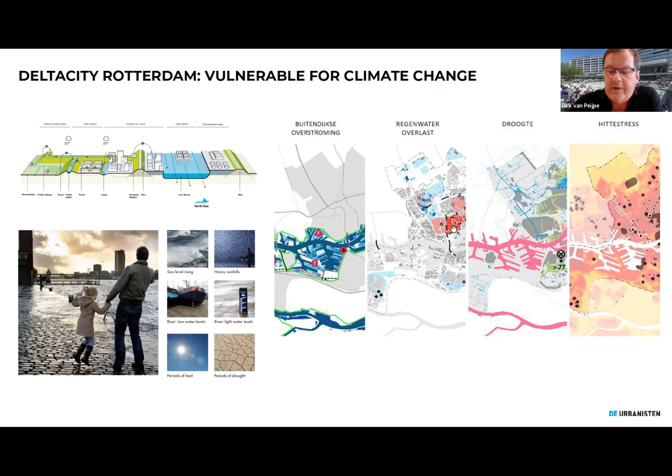Well, thanks for the invitation. I'm happy to lecture in Pavia. I learned it's not Pavia, but Pavia - we have some Italians working in the office, that's the reason why.

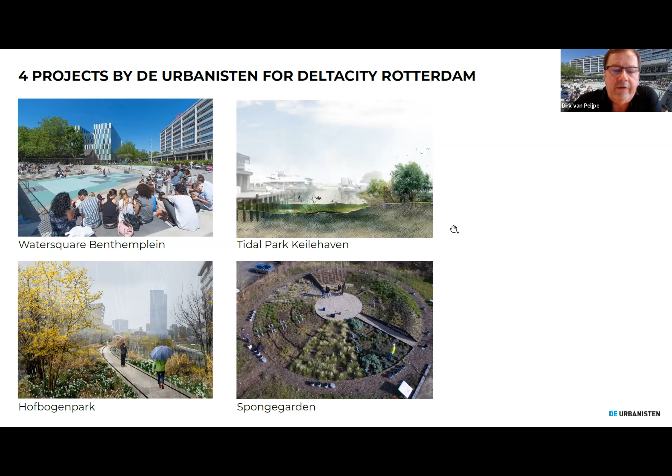What I wanted to do is basically very shortly introduce the office, but I would quickly touch upon the main mission or vision that we have on our profession, which is landscape architecture and urbanism. I decided for this lecture, because the theme is very much about water in places, to select four projects that we are doing or did in the city of Rotterdam, which is also our hometown. So that will be the build-up of my lecture.

To start with the team, we are around 12 dedicated designers. We're international, and some of us are educated as urban designers, others as landscape architects. Our projects vary from larger scale urban studies, research and design, to urban plans and public space design. This is just a collage of work we do.

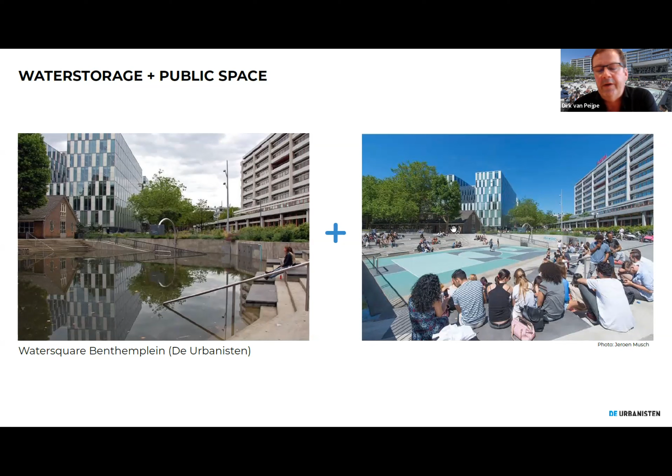In almost all our projects, as you might already have seen when you visited the website, themes like climate change and loss of biodiversity or energy mitigation are important for the agenda of our office, and to integrate that into our plans is one of our main goals.

I'm not going to extensively share all the issues that come with climate change, but I want to start with this. This comes from the summer of '21, and basically what climate change means is that we have to start dealing with extremes. It's not only too little water, but also sometimes too much water, and even sometimes in one month you have both conditions.

So it's first of all how to deal with these extremes of climate change, and I think specifically where water is part of the urban configuration - I'm talking about delta cities or cities that have larger rivers or river basins - we see accumulation of problems. I'll get to that later, in our city in Rotterdam.

So for me, one of the starting points in starting the Urbanisten with my partners, was the question: can we make our cities more climate sensitive, and specifically sensitive instead of climate proof? Because I think it really links to us as people and the daily living environment that we have, to not only make it climate proof but also more attractive. The way we approach our project is, first of all, this question: can we make our cities more adaptive to climate change?

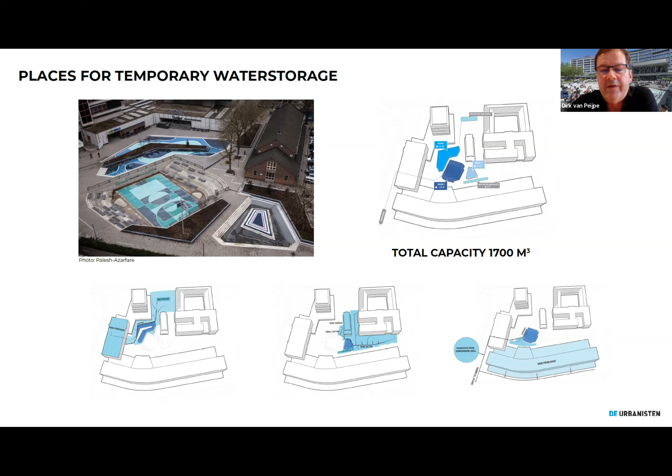And we have references from the past in which we were more in balance with nature, you might say, and our architecture was also taking into consideration the climate conditions we were building in. It was Darwin who said, in the end, it's not about intelligence or strength, but more the adaptability that makes the difference. Well, I wanted to introduce a second hero, if you might say so, which is Jan Gehl, from Copenhagen, Denmark.

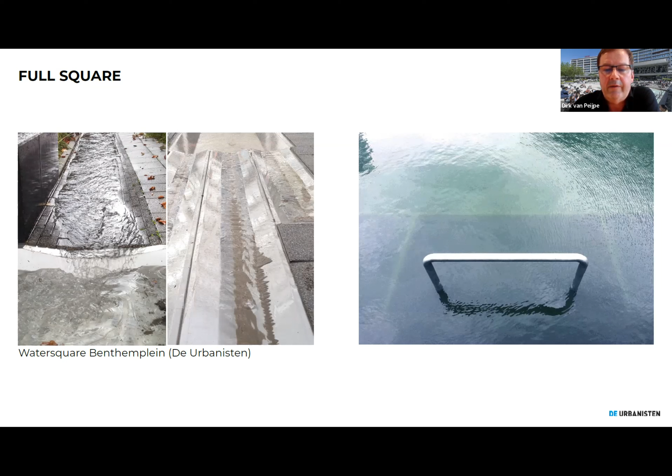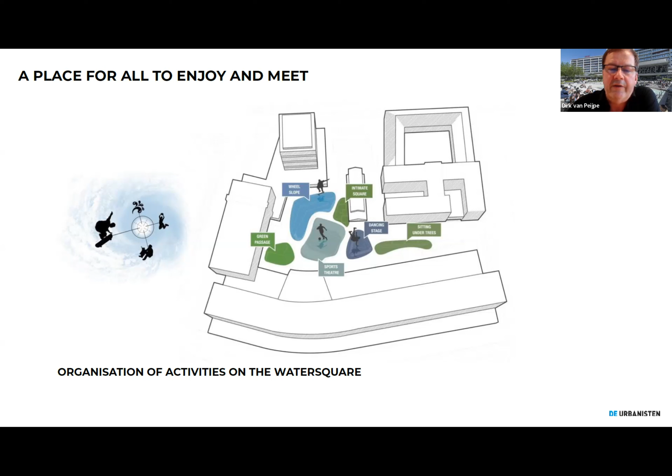It's relevant not only to focus on climate adaptation, but also immediately link that to our profession. So can we make our cities more livable and attractive at the same time? Otherwise, you're just only solving a problem. Jan Gehl is an inspiration because he says we have to start with life, and life in the city. Cities are for people, and then you might look at and design space. And finally, of course, it's also about the buildings, but it's in that order - life first and buildings last. That's an inspiration for me as well.

So the question is, can we, and how do we do that? We need to integrate our climate-proof measures into our cityscapes. And that's what we've been doing with the Urbanisten ever since we started in 2009.

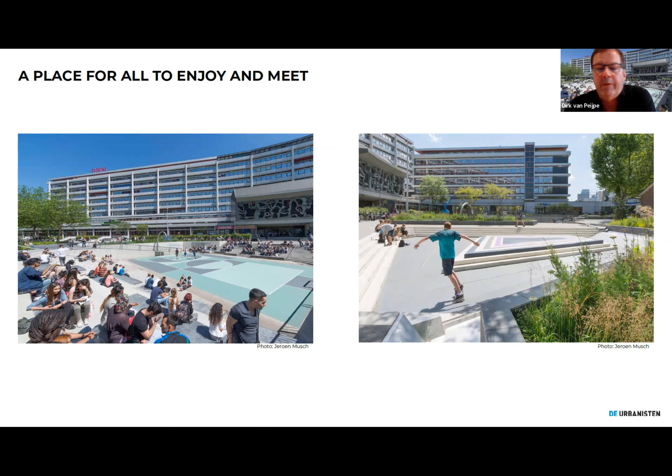We come from the city of Rotterdam. I don't know if some of you have visited the Netherlands in this part of the country, but for those who didn't, it's a delta - it's the end of big rivers coming from Germany, ends up in the sea, and also has an open connection with the sea. It's a major port city, but also a regional economic center.

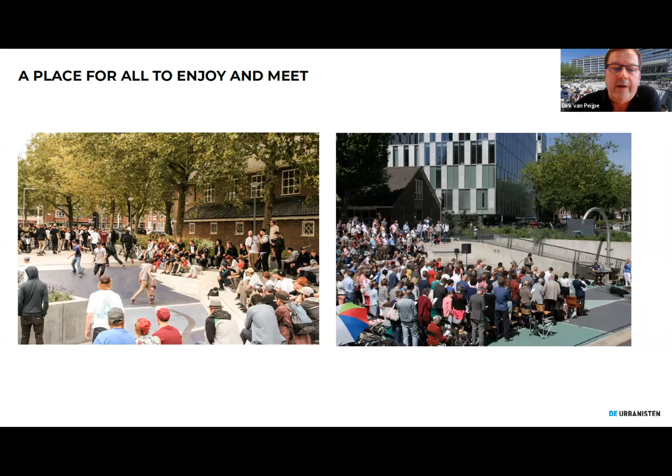And for the Urbanisten, it's not only my hometown - I live in Rotterdam - but it's also what we call our living lab. This is the place, this is a city where we can do our research and design. Also our realizations are located in Rotterdam. Not only in Rotterdam, by the way, we work in many other European places as well, but Rotterdam is important for us.

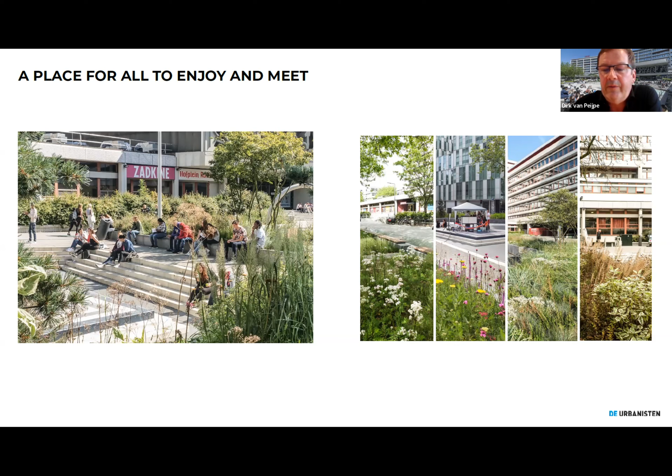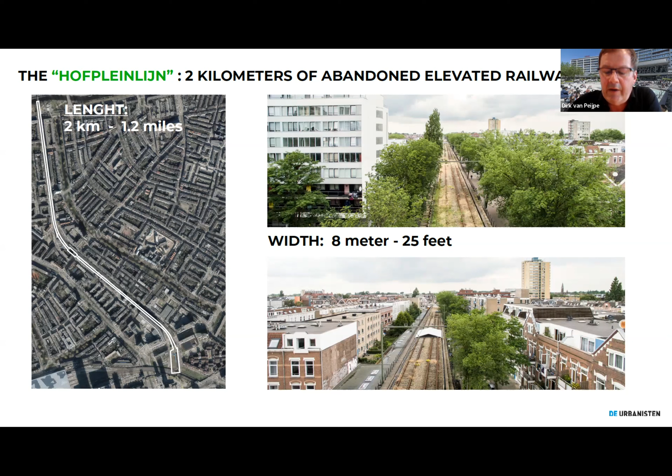It would take a complete lecture to go deep into the systems and situation of this delta city of Rotterdam when it comes to the impact of climate change. For now, it's good to know that the city has quite a robust system to deal with flooding, drought, heat and rain. But given more extreme situations, and given that water is so prominently there, there's a sort of vulnerability. So if there's a city that needs to look ahead and see how to act, Delta City Rotterdam definitely is one of those places. We did projects there that deal with this vulnerability, but also try to add a quality of space.

I'll run through 4 of the projects that we have done or are doing: the Water Square, which probably is well known to some of you; the Sponge Garden, which we realized 2 years ago right in front of our office; and then the Tidal Park and the Hofbogenpark, both also in the city of Rotterdam.

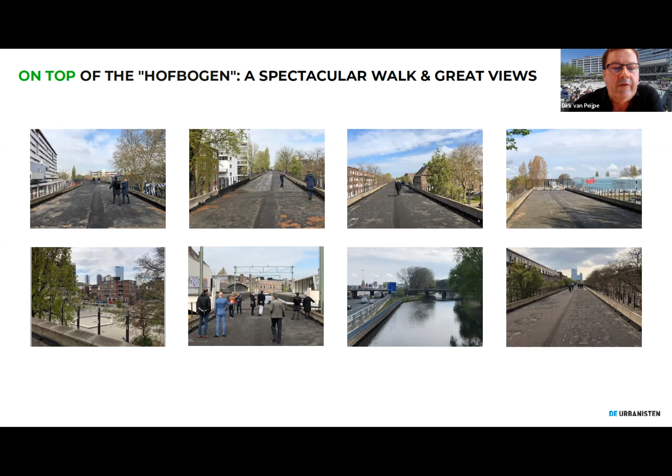I want to start with the Water Square, a project that was realized in 2013 or 14 in Rotterdam. The main idea is very simple — it was innovative and groundbreaking at that time. The idea is simply this: you create a public space that can also flood in situations where we have an abundance of rainwater coming into, in this case, a quite dense built-up urban district.

This rainwater, in the old days, ended up in a combined sewer. So one of the main interventions, of course, would be to disconnect rainwater falling in this area from this combined sewer and bring it into a basin that can flood. That's the simple idea. Well, to elaborate a little bit further...

Let's first focus on the water management. There are different places that we created because we needed topography. The square was entirely horizontal and flat when we came, but we needed topography to organize these water management buffers. So we have three different spaces that all have their own catchment area of rainwater.

We have 2 basins that are relatively shallow and take local rainwater from both public space as well as roofs. And then we have a bigger basin that also takes the largest part of the water from the surrounding, the biggest roofs, but also from a nearby district. The total capacity of these 3 basins when it comes to water storage is around 1700 cubic meters.

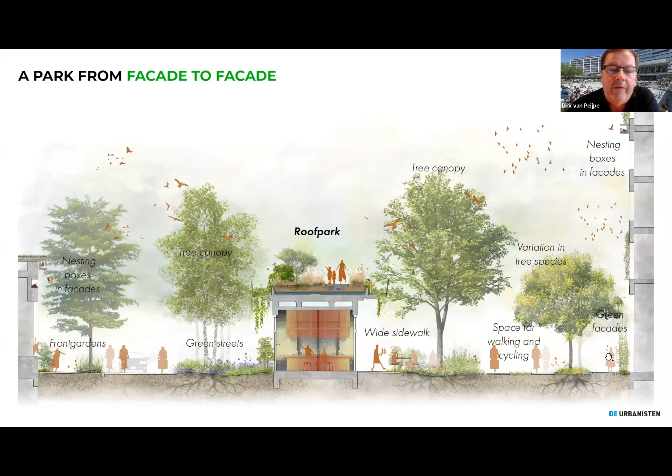It's also important how it empties. The 2 shallow basins both have an infiltration facility underneath the pavement. Of course, that takes time, but water from there will just return into the groundwater system. The other basin is underneath the groundwater level in Rotterdam, and that is pumped out to a nearby canal. So none of the rainwater will end up in the combined sewer anymore.

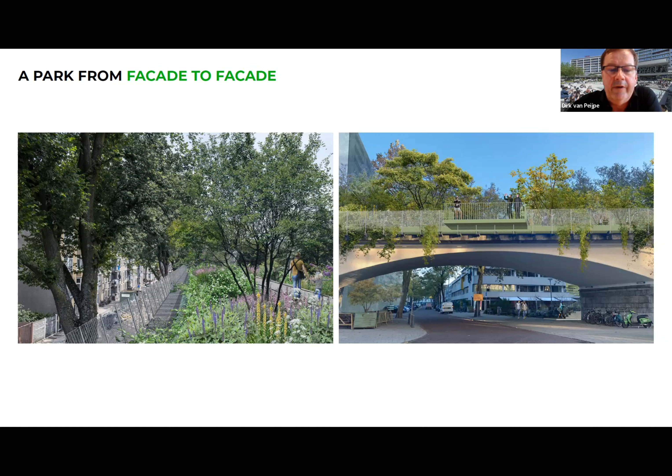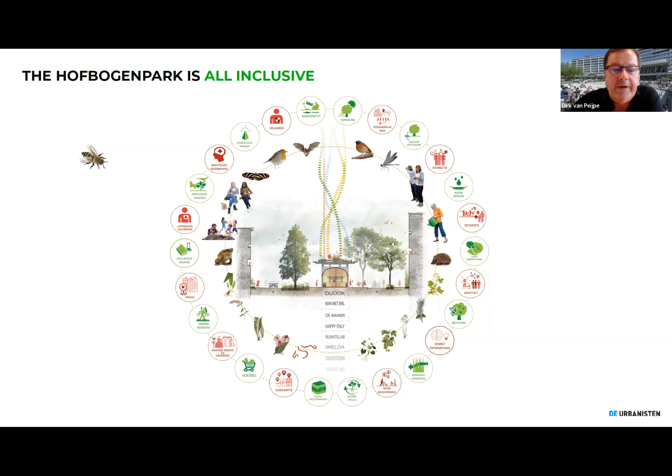Later on, if you have questions, I can answer them, but now we'll continue with what is as important, or maybe even more important, which is how to actively use the square. There are quite a lot of different groups of people or communities that all have their own ideas about how to use the square, and we try to organize it so there's some overlapping, but also so people will find those places and environments for what they want to do on or around the square.

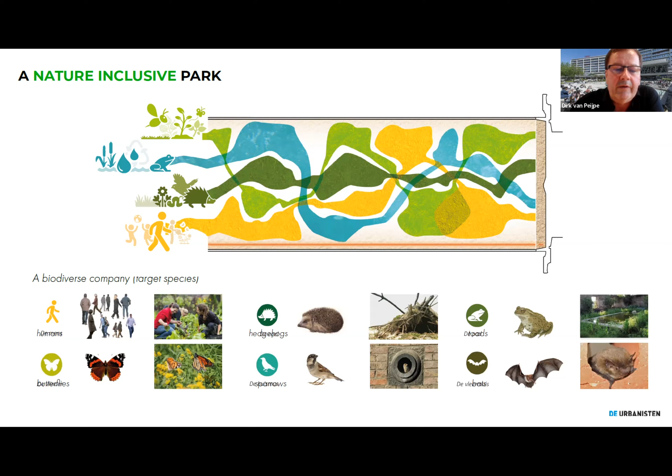A major community is the students that study in the big building you see on the screen, also some other buildings around, and they actively use the square for their lunch breaks. Some bring their skateboards, you can play ball, and specifically the deeper theater space is also used by others.

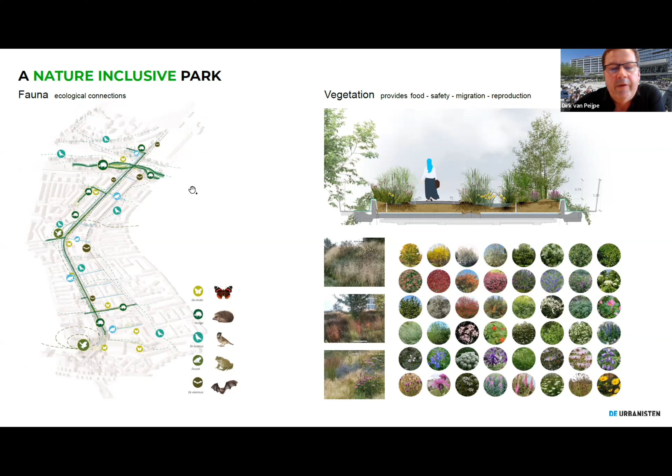The church that has a place on the square brings out the community for open air services. They also baptize their children outside, but skaters can also actively use the square. So it's a really nice combination of different communities that all find their place to enjoy and meet on the square. Sometimes you can also just be alone, being young or old, also possible on the square.

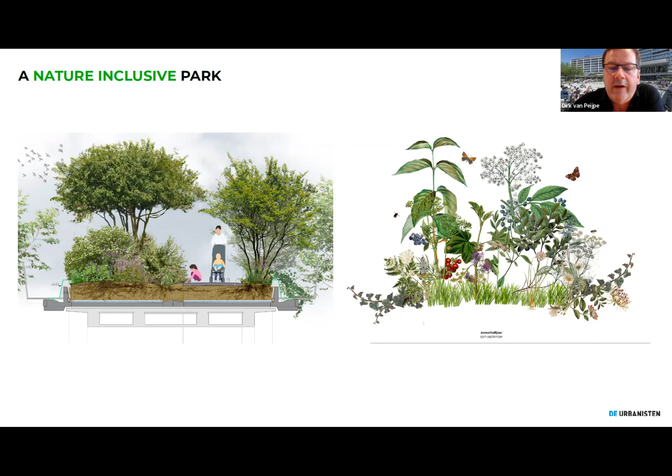And we try to make it as green as possible. There's still a little hard surface, and quite a lot of hard surfaces that have to do with the simple fact that we need to store a lot of rainwater. If you have soft spaces, that will take more time to infiltrate. But we try to make it as green as possible.

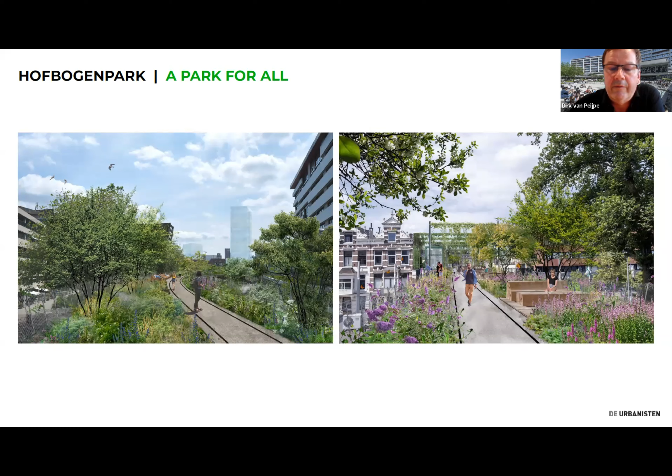I want to take a second project into account that is not yet realized, but it's work in progress. This project is called the Hofbogenpark. It's not far from the water square. The water square is situated at the south end of this long line that has a length of 2 kilometers, which is known as the Hofpleinlijn.

It's an abandoned elevated railway that runs through the northern districts of Rotterdam. On street level, it's quite a structure. It's a heritage, it's a monument. There are 189 arches, rented out to different entrepreneurs.

The side streets are quite dense with traffic. On top of the Hofbogen, the trains are no longer running, and all the train-related materials have been moved away from the viaduct. So you already have quite spectacular views and a great walk from the city center to the outskirts of Rotterdam, or the other way around.

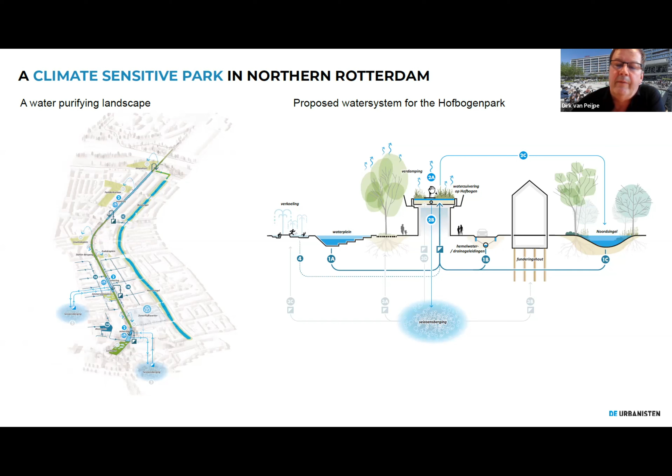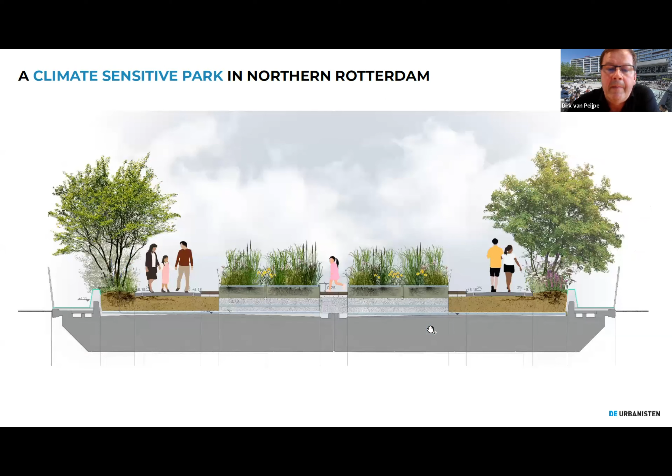We were commissioned together with DS landscape architects and Dakdokters, to design a park on top of this viaduct. Some of you might know the High Line in New York. Well, it's not going to be a High Line in New York. But if you have a simple idea of bringing a park on top of a viaduct, that fits the conversation. We're doing a few things different from the New York High Line.

The first thing I want to stress is that we not only make a park on top of a very small but long stretch of viaduct, but we also really make it a network park. That means the greenification, or the de-paving, of the immediate surrounding streets and squares is part of the master plan, part of the project. That's extremely important because it is such a small stretch that some of the park activities are simply not possible on this roof.

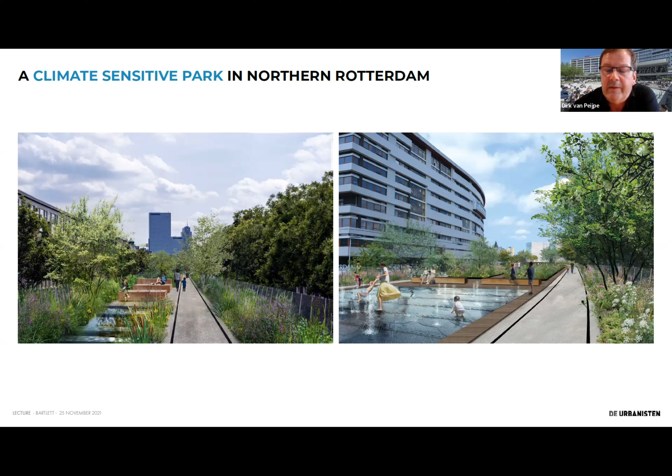So we need the surroundings for that, but it's also relevant to restore, and we'll come to that later, some of the water and ecological systems in this northern district of Rotterdam. So it's a network park, and that means this is the section that comes with that.

We're not only looking at what's going on top of this viaduct, but we try to link that to the streetscapes around, see if we can increase the density of trees there, decrease the amount of hard surfaces and pavements, and see if we can create nice places on the ground floor to linger and relax. But also really see if we can, on private property, start working on green facades, green roofs, nesting boxes for birds and bats, to really make it an integral park that adds to the quality of life of the people living in the northern districts of Rotterdam.

So there are some images of the design as we are making it, and later we'll get into the landscape itself. One of the purposes we have is not to make it an ornamental garden, but really a part of a landscape that links to the local characteristics of the Delta city of Rotterdam.

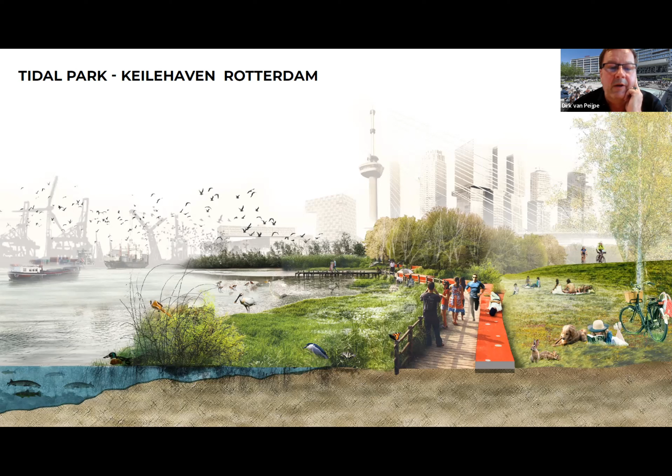The second issue that I think is really distinctive from, for instance, the High Line, is the fact that we want to make the Hofbogenpark all-inclusive. By all-inclusive, I mean we're not only designing an environment for young and old, rich and poor people that live around, but also for our animal friends. That means we look closely at what they want and what they need to be present in our Hofbogenpark, which is a design task.

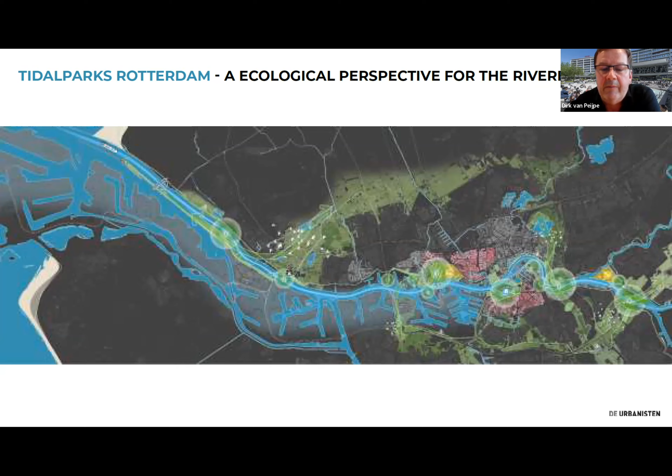For instance, when it comes to the selection of vegetation and the delivering of shelter and so on, our park is nature-inclusive, meaning we create spaces that other animals demand. We selected a few target species, and the idea is that if you create a proper park for them, you have quite a complete habitat or ecosystem of flora and fauna present in your park.

We worked together with DS Landscape, which is important because they select the proper vegetation that delivers food and shelter, and also makes it possible for butterflies to lay eggs, for instance.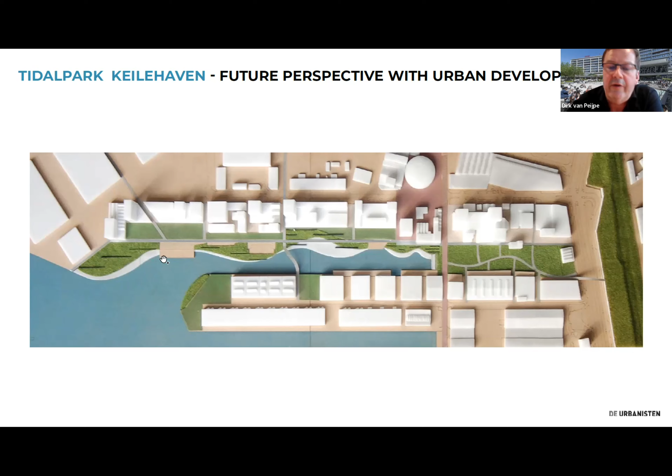Last but not least, on the Hofbogenpark I want to stress the water management. Here we took, I think, a next step in what you can do in the urban environment when you want a more circular water system - you might call it the city as a sponge, as the theme.

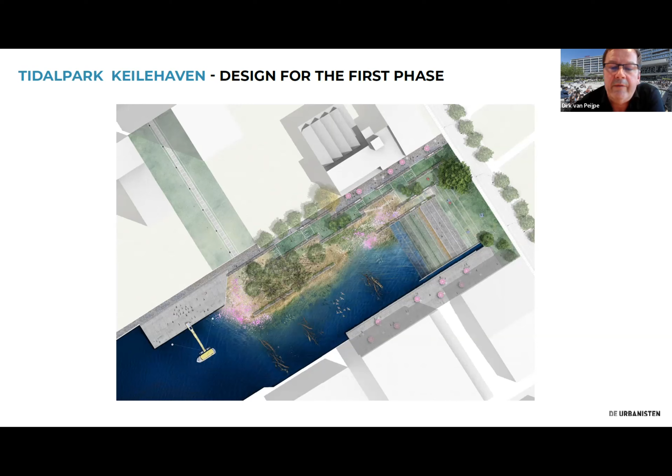Having done that, it's possible to bring that clean water into an aquifer, a seasonal storage that is an underground groundwater layer that is relatively stable. And once you've done that, it's also possible to bring that same stored water back up to the park for different purposes - that's the whole idea here.

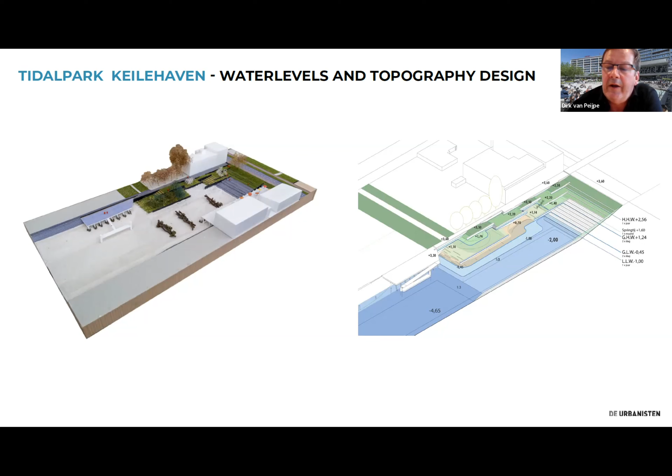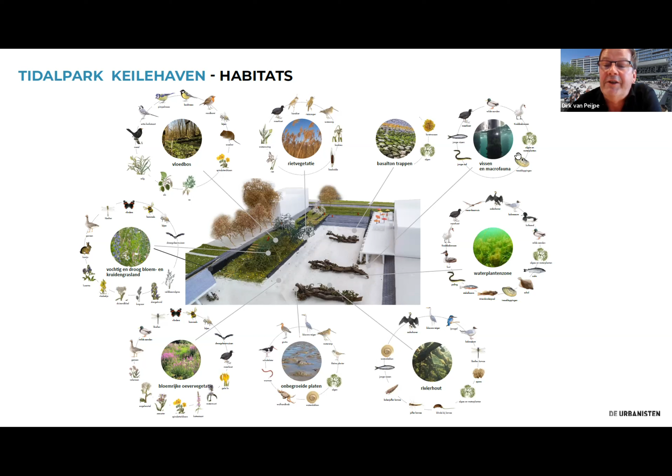But it's clean enough also to have as a landscape element. So the last part of the project, we introduce a small stream that's also linked with the desired species and vegetation as part of our roof park. It's even clean enough to enjoy in the form of fountains. And as we all know, water doesn't necessarily cool things down by definition, but actively evaporating water, like fountains, does cool down substantially the temperatures during hot moments.

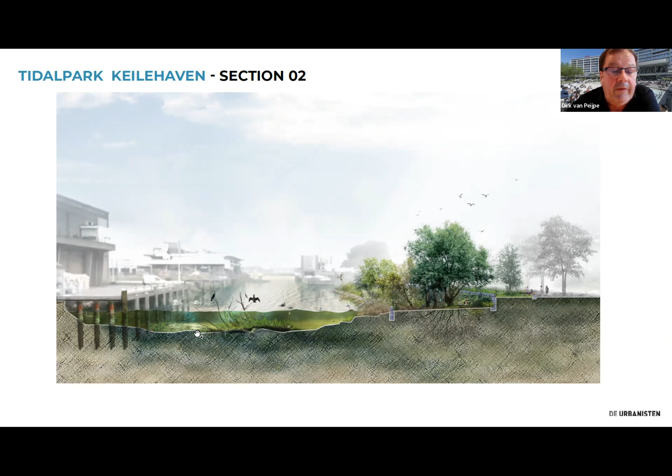So that is the second project I wanted to share. I don't know how I'm doing on timing, but I'll just continue, and I'll hear a stop when the time is over.

I'm still there? Yes, okay, yes. Okay, it's okay, you have your time. Don't - you're not hurrying. Okay, all right.

Third, which is a different typology but as interesting I think as the water square and our roof park, is what we call the tidal park for the Keilehaven in Rotterdam. It's different because it has a different position in the Delta city. The tidal park is all about the reconnection of the tidal waters of Rotterdam, which still has quite a serious difference in low and high tide - around 1.2 meters on average, but it can add up to 2.4 meters in an extreme situation. So it's about reintroducing or reconnecting the city with this tidal river and the landscapes that come with it.

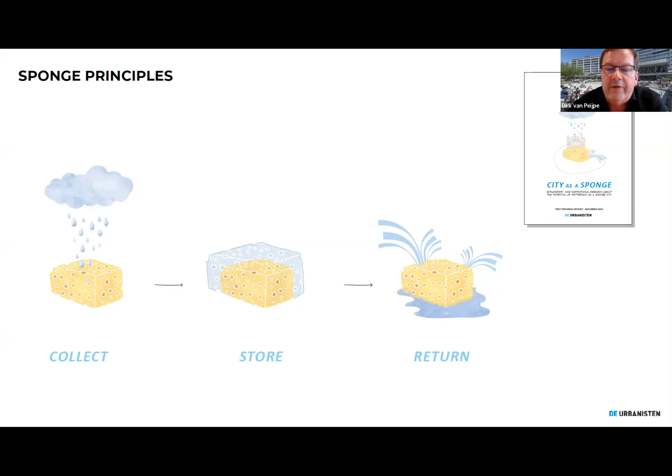The idea of a tidal park is super interesting, because at the moment these waters, from an ecological point of view, are basically deserts. They are very deep, so there's hardly any ground life on the bottom of these harbor basins. The waterway itself is kept at an extreme depth, between 5 and 10 meters. Most of these harbors in the inner city part aren't even actively used anymore as water bodies - they're basically there without any proper use.

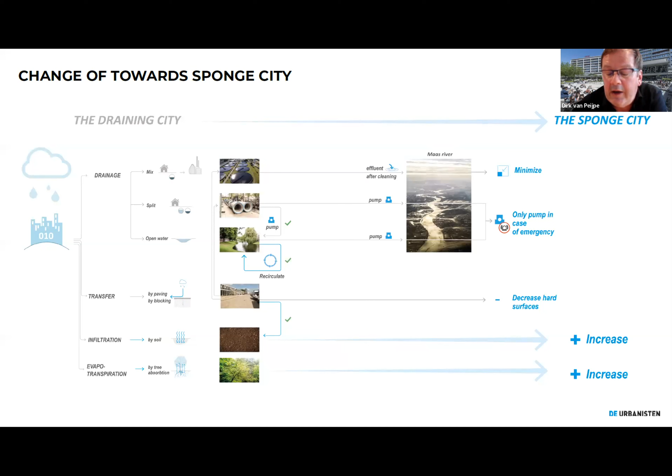So what you see is sort of pioneering things happening, creative industries moving in. But the end perspective is to really have a more dense, urbanized port area, and our tidal park is part of this new development. The first phase will very much introduce a new typology.

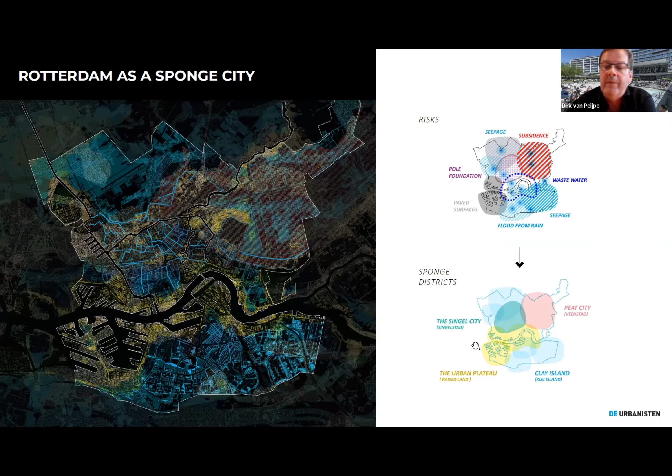What we wanted to do in the tidal park is really reintroduce all the gradients that come with this delta - the gradient between dry and wet and everything in between, the gradient between high and low, between sweet and salt. Visualizing these gradients in the project was our major objective, not only for us humans, but specifically to make it again a nature-inclusive environment.

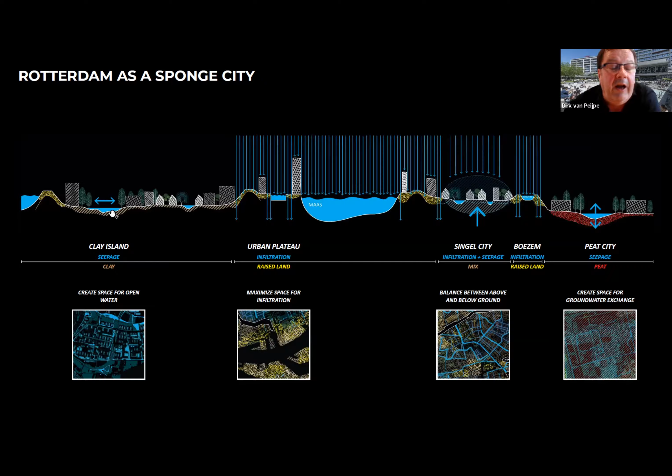We can also add wooden structures, wood, trees, to make it possible for plant life to go down to the bottom. As soon as you have plant life, you also might expect smaller fish, and when you have fish, you also might expect birds and so on. So it really starts at the bottom of the project.

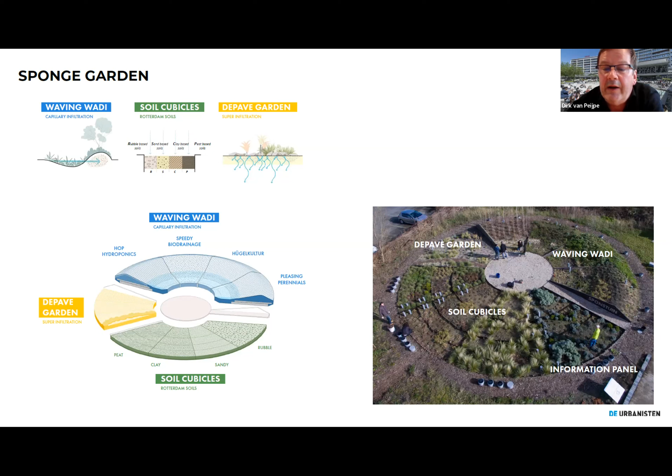This is interesting because you get gradients of different conditions for plants and soils. Some areas are underwater twice a day, so there won't be a lot of plants there, but there are quite a lot of birds interested in these environments. The higher you go up in the park, the more you have a complete cycle of animals, with small mammals joining in, and not to forget the underground microfauna, fish, plants, and all the animals that come around that.

And last but not least, I want to share a small project that's right in front of our office. It's called the Sponge Garden. The Sponge Garden is the result of quite fundamental research that the Urbanisten did on the concept of a sponge city. In this case, we projected that onto the city of Rotterdam.

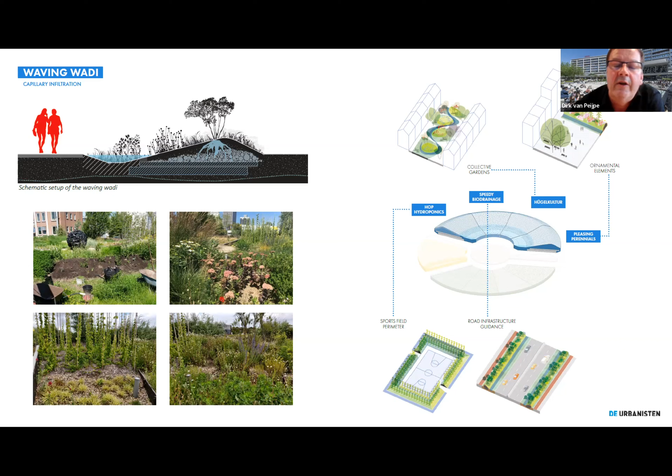I could lecture on that for a longer period of time, but the time isn't given at the moment, so I will skip most of the research, but I want to touch on the most important principles. The first idea about the city as a sponge is that it basically works as a sponge.

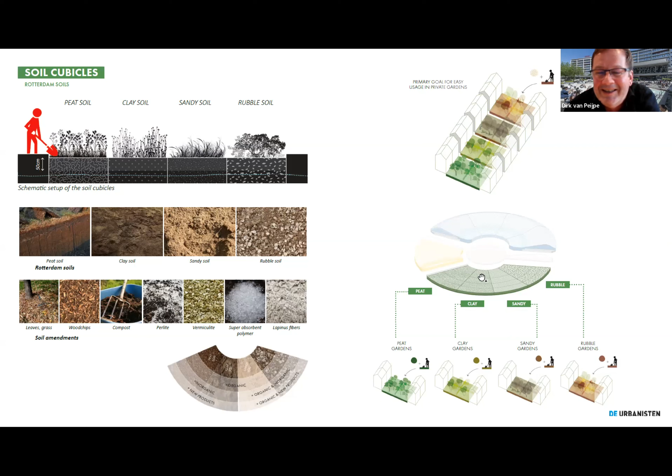It might collect an abundance of water, and we talk about rainwater specifically, though it could also be groundwater. Like a sponge, it should and could be able to store that for a longer period of time, and be able to return the water when it's needed. This again has to do with the extremes I started my lecture with, that sometimes we have too much water and sometimes too little. We have to deal with these extremes in a more natural-based way than with technical infrastructures, and that's the key issue of the sponge city.

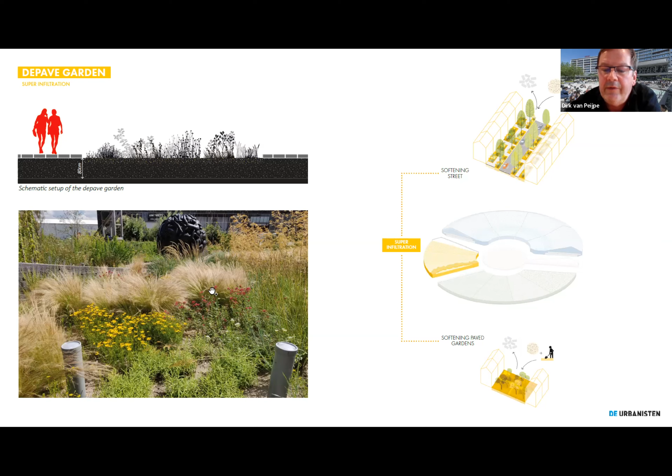So on a city scale, we're really moving from what I think is a 19th century concept for water management in urban areas - draining it, getting rid of it as quickly as possible - to what we call the sponge city, which is to start keeping the water, reusing the water as much as possible, and bringing it back to its natural environments as much as possible.

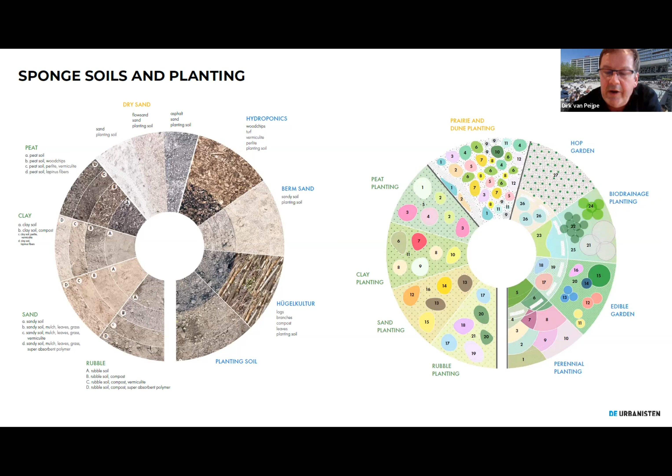This means that, of course, you still have black water with effluent that ends up in the water body of the Maas, but you start thinking about how to downsize these flows of black water.

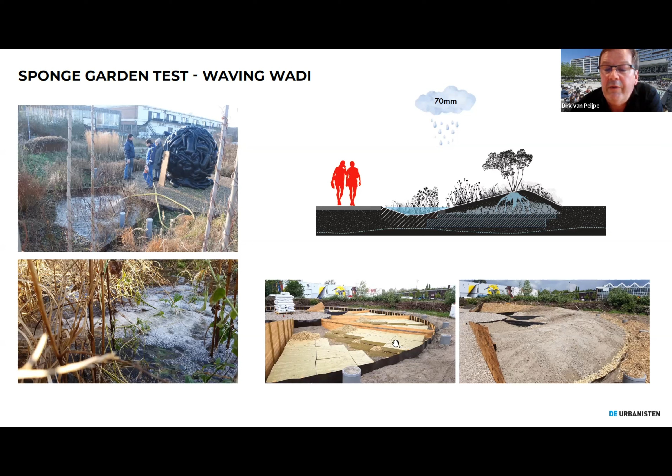Definitely you need to organize it in a split system, so you have to split black water, like water from toilets, from rainwater, and preferably create space in the city itself, making open water. Instead of draining, it's much more interesting to see if you can reuse and infiltrate or bring the water back into natural cycles, which simply means looking at infiltration space in green space. This all contributes not only to the sponge city and its water management, but also to a pleasant living environment and ecological values. That's the idea of going from a draining city to a sponge city.

And looking at the city of Rotterdam, we researched a lot of the issues that come with making this system change to a sponge system.